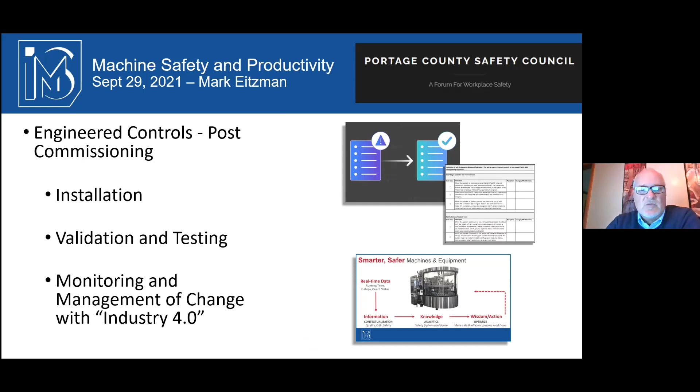We'll spend a majority of our time on that today as well. But the first 4 sessions took us through the first 3 steps of the machine safety life cycle. We're going to finish up the last 2 in just 1 session here, but this will give you some context to where we are, with the process flow.

So let's first start about installation. In particular, the safety engineered control solutions that we were talking about in the last 2 sessions in detail require that they are installed properly. And we'll try to do some checking on this stuff after they've been installed, but there's some things that even the validation and testing won't cover.

So there are contractors out there that are better than others at handling or installing these sophisticated machine safety solutions and the technology, be it hydraulic, pneumatic, electrical, or electronics. So it's just something to keep in mind.

The standards that guide all of that here are from NFPA and some IEC standards that look at how these items should be wired, how things should be routed and installed. And so some conventions are good best practices, not only for electrical safety, but for the installation of these electronic, electrical, pneumatic, and hydraulic solutions.

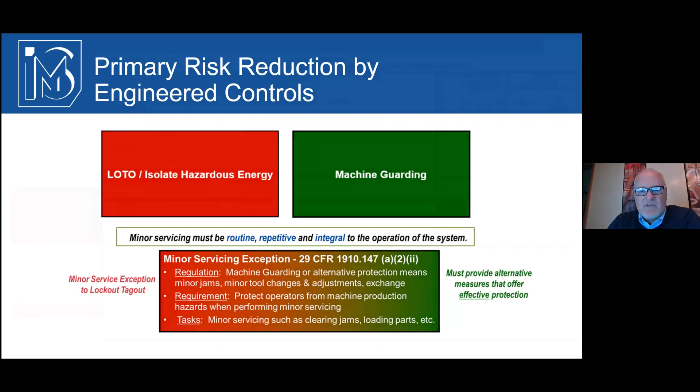So we're going to concentrate here primarily on the minor servicing exception solutions that we talked about last week, the engineered controls aspect of it. Just a reminder, the default is still lockout, tagout, and fixed guarding. But when we require access to a machine with energy on, all of those neat solutions we came up with within the minor servicing exception are listed here. We went through each of those as well, and you saw in the previous sessions how much work and what goes behind putting solutions like this in.

So if you ever hear somebody who may not be as familiar with the details say, hey, let's just put a light curtain on there, or let's put a safety mat there, or let's put a safety valve on there, you know what goes into it.

That's why we touched on this aspect of performance level and the attributes of those circuits - the wiring structure, the reliability of it, the ability for it to diagnose itself. The performance levels in the chart we showed you, at least the calculations, these first three attributes are all that really show up in the performance level calculations.

The measures against common cause failure, which are really about how this thing is installed, where it's installed, what the environment is around it, is a pass-fail aspect of it. Essentially, if we can't guard against common cause failures, we fail this test. It's a go, no go, pass-fail aspect of it. If we can't pass this, all of what we just talked about - the performance level, the circuits - all of those solutions are not viable anymore.

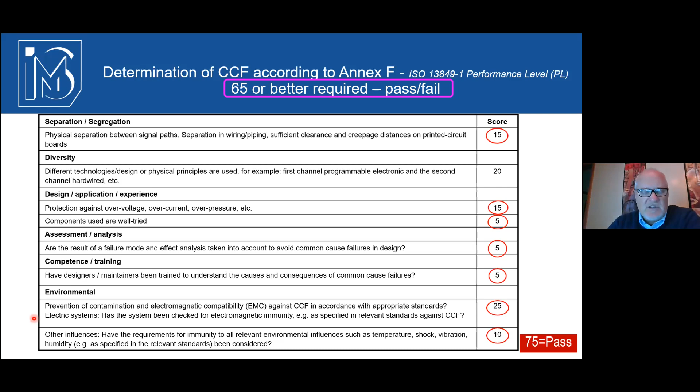So here's the test - we saw it in the ISO 13849 pass-fail test. A lot of that really goes into the installation of it, and it's not something that should be taken lightly. Any contractor that installs wiring or pneumatics or whatnot, you really want to vet them to determine whether or not they're familiar with those standards we mentioned, and whether or not they have some experience installing safety circuits.

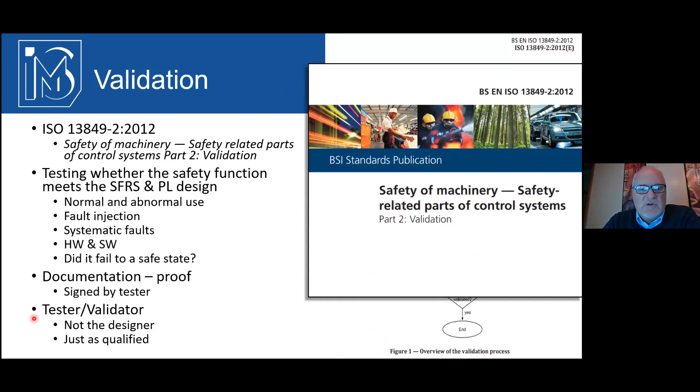Okay, so let's assume we have installed it using a competent contractor, and we're going to move on now to the next step - the validation of it. This is basically laid out in a specific standard, 13849-2, that will lay out the process at which one goes through to validate these circuits. So again, we are depending on a circuit as our primary means of risk reduction.

So what we're going to do in the validation step is actually try to see if we can get it to fail. We're going to induce faults during normal and abnormal operations. We're going to see, will that circuit fault to a safe state? We'll mess with the hardware, the software, the wiring of it all, and see if, in the foreseeable use and misuse of this solution, it faults to a safe state. And we'll document that as well.

The person doing that should be familiar with these as well. There's recommendations that the person who designed the solution and installed the solution should not be the same person who does the testing of it - sort of like doing proofreading. It's harder to proofread your own stuff than to read somebody else's.

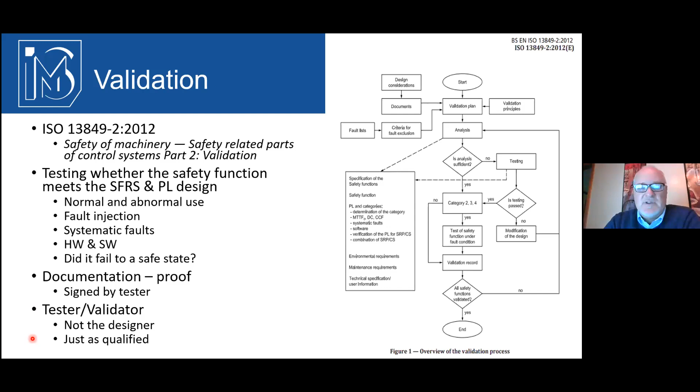What OSHA is going to be concerned about, and what we should be concerned about here, is this concept of control reliability. Really, that's what we're putting to the test - in the definitions of control reliability, when using a circuit like that, is whether the circuit can withstand a fault.

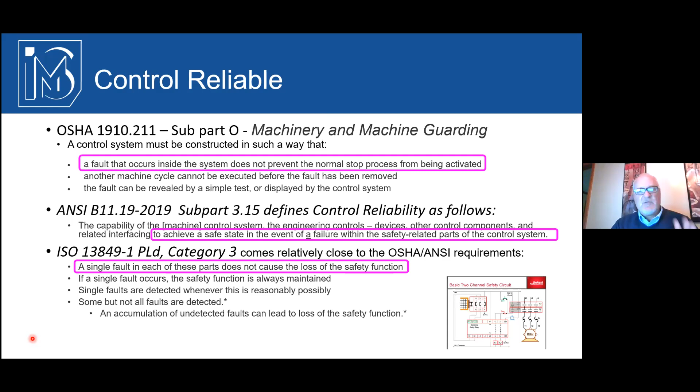So we're going to induce these faults. We're going to break wires. We're going to intentionally short circuit things. We're going to disconnect communication cables and see, does the machine stop or get to a safe state? Does it fault, and does it fault to a safe state in every which way we can? We're going to do all sorts of abusive stuff to this thing, probably well and beyond what we'll see in its real life, but to see how it will work - during normal and abnormal operations, we'll try to make everything fail and see what happens.

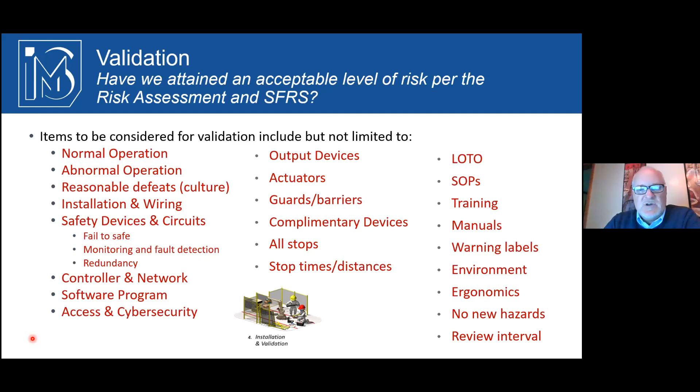Further, we'll document all of this stuff, and the person doing the testing will put their name on it and ensure that, yep, these were tested. This becomes part of your archive.

I can tell you there are some companies out there, I'll name Kimberly-Clark as one. If you've ever tried to sell a machine or been involved with anybody from Kimberly-Clark, they won't even consider a machine builder at all if they don't have what's called V&V documentation. That's verification and validation. So that verification we talked about in step 3 when we were designing those safety circuits, we'd use Sistema to get a verification report. Did I design this safety circuit to meet the performance level that is reflected in the level of risk which that is going to mitigate?

That's the first one, that's a verification, third-party verification. Now I'm going to validate this after I install it. Are all my engineering assumptions correct? And did my stop time calculations and whatnot all do exactly the way it was supposed to? So then I put my name on that, and that becomes part of the archive.

So if Kimberly-Clark is buying a machine, they will not buy it until they see the verification, the validation, the V&V documentation. That's an example of an extremely mature company. You might want to consider that. Test your machine builders. If you're buying machines out there, or if you're a machine builder itself, you may consider that as a valuable investment in marketing your machine, that hey, we're a safe machine builder. So all of that kind of boils back to the first session we talked about, which is the safety maturity level of the market and the industry or segment customer you're talking about here.

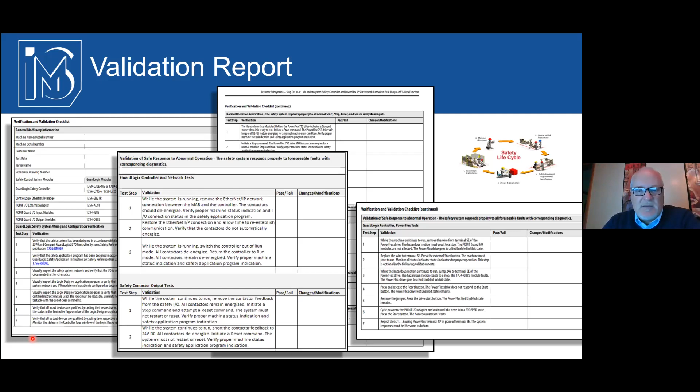Okay, so we've installed and we've validated, we've documented all of this stuff. So we got a lot of great stuff going. So now what? The contractors leave, everybody's gone, we're running the machine. What happens after that? How do we ensure that these really cool solutions we're depending on - remember, you're going to have your daughter reach her arm into that machine, and it's only a circuit that's keeping her arm from getting cut off. Think about it that way. Well, how are we going to ensure that is working throughout the entire mission of the machine? And by the way, the default in the standards anticipates that a machine will last 20 years. So how do we ensure that circuit will be operating as expected for 20 years?

So most companies have some sort of management of change process or procedure in there. The question is, do we have specifics for these engineered control solutions where we are testing those on a periodic basis as well? This should be part of the corporate policies, but the issue comes in when we talk about the limits of the machine in particular - how is that machine operating, the temperature, the humidity, all of that stuff. And the recommendation is, if you install a machine in the winter, test it again in the summer, and vice versa, because a hot and cold machine will operate differently. So all of those assumptions we made versus the actual of what we're anticipating - are we seeing that?

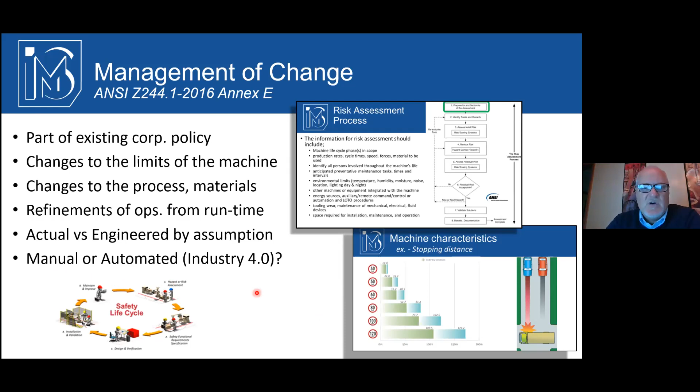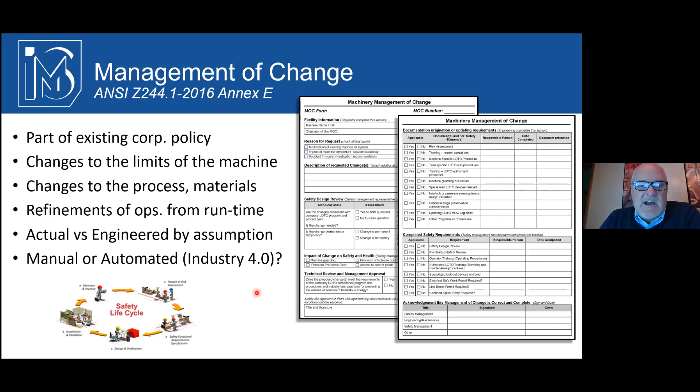So we've got a choice. We can run this manually, where we have forms and people doing testing observations or writing stuff down on a periodic basis, or there's the ability to make some of this done in an automated process. So here's some examples of the manual process, but we'll talk about next some of the more visionary things companies are doing today - how could I automate some of these checks and balances as well?

So the question also arises, how often should I be testing these safety circuits out there? Unfortunately, there's not a lot of guidance - in fact, there's almost no guidance whatsoever from the standards. But here's some concepts or ways we can look at this. The way I would look at it is that if I'm using an engineered control as the primary means of risk reduction, I would use that risk assessment to determine from the start to what degree am I reducing the risk. So if I'm reducing something from very high to negligible, I should probably test it more often than one that's going from maybe a medium to negligible, because you are talking about an investment in time and effort. It probably isn't going to be something that damages a machine, but it will take some investment and discipline to do this on a periodic basis, and keeping a qualified person to go about doing that as well.

The real issue is, one, the degree to which I'm using this and how much risk am I reducing, and the other part is if I'm dependent on these limit values—speed, motion, force, momentum—and my calculations and utilization of the engineered solution depend on the consistency of these flexible attributes, we should probably increase the frequency of testing. Take those two considerations into thought when deciding how often to test these.

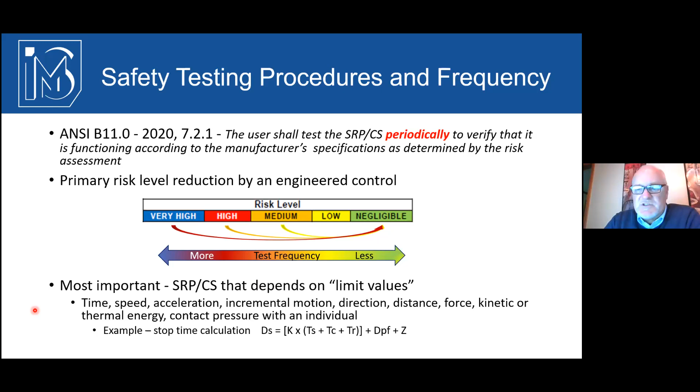I mentioned earlier there's a manual way of managing change, and there's also ways to leverage Industry 4.0 or digital transformation—the fourth generation or fourth revolution in industry—and these are the attributes of it. When we look at a digitized manufacturing facility, you see four main components and how they could be used for safety systems, in conjunction with how they're probably already being used for aspects that affect manufacturing efficiency or OEE.

But the safety system can kind of hitch a ride on the Industry 4.0 wagon as well. It requires some interconnectivity, some infrastructure. There's information embedded in the machine and machine control systems that can be extracted. This gets into a procedural and cultural aspect: do we have the people in place to use that information and interface with it to make improvements in the manufacturing process?

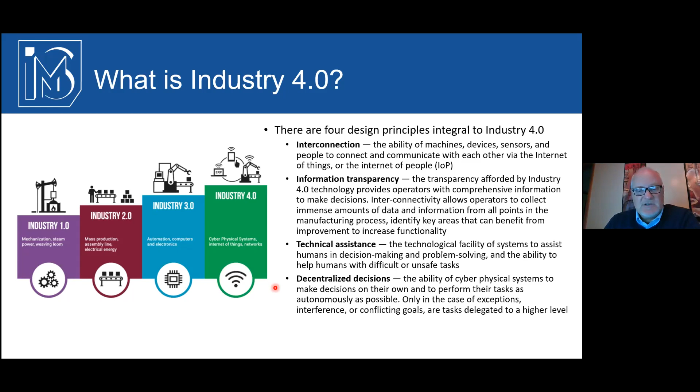Can the machine itself provide technical assistance in diagnosing and getting machines back running again, and or can the machine itself make decisions in order to optimize operations? So those are the primary tenets of it.

To be transparent, safety in Industry 4.0 requires a couple of attributes for the facility. One is all that interconnectivity—there needs to be a control and networking architecture, data capturing historians and whatnot to create data, and then a pipeline and means to display the pertinent information. So all of this infrastructure needs to be in place, along with an integrated manufacturing maturity as well as the safety maturity we were talking about—the culture, policies and procedures, and the technology available.

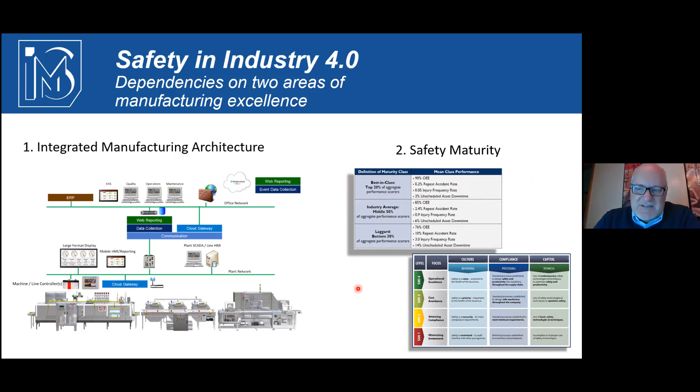This gets into the causation aspects—how are these best-in-class corporations attaining such outstanding productivity numbers and outstanding safety KPI numbers? That's kind of what we're talking about here and what we talked about in the past several sessions. This is the causation part of it—how are they attaining that?

So the concept of safety in Industry 4.0 - and you can put productivity, quality, all of this stuff in here too - the flow is, think of this as... and this is just an example machine. This is a rotary filler made by BevCorp out of Willoughby, Ohio.

You can see the glass or plexiglass guards that are keeping it contained. All of those guards are movable because access to that machine is required for cleaning and for adjustments and stuff. So this is a good example of a highly collaborative machine type of scenario.

Obviously there's sophisticated controls in there, and inside those sophisticated controls - basically the computer that's running the PLC, that's running the machine - there's data on exactly how that machine is running. The flow here is to take that data, contextualize it, turn it into information, present it to people or maybe computers that can analyze this and turn it into knowledge.

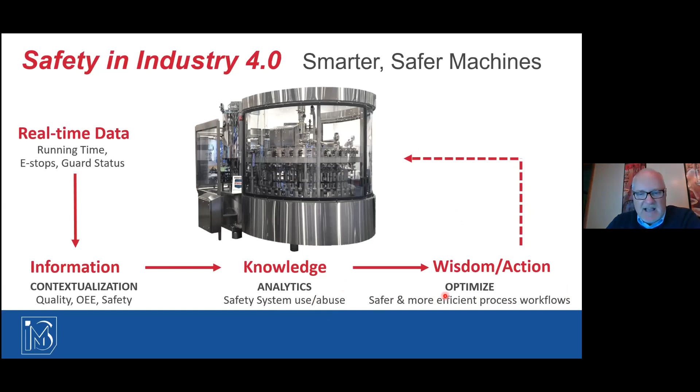Take some action then and say, let's close the loop on this and make some continuous improvement efforts based on the data and based on the analysis of the information. Let's go take some action.

Some examples of the data on our engineering controls that are on this machine are the raw numbers that are going to be housed - they look like this. They're not very helpful in this form, but this is the raw data that would be in a programmable controller data table, looking at the data from the sensors and from the actuators and whatnot. But you'll get raw numbers of these aspects of it.

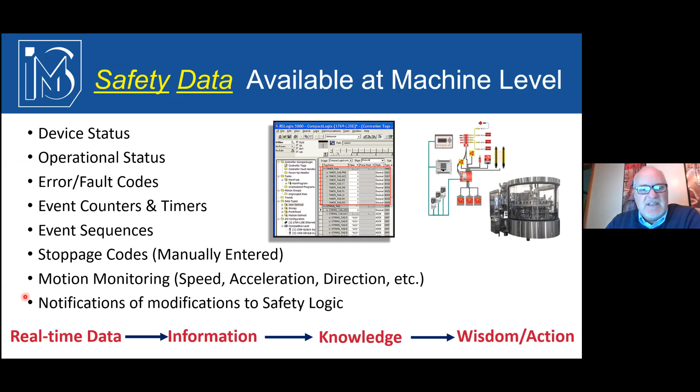The next step is to then contextualize that, put it in some sort of information process. So a historian or computer algorithms that are going to present it and turn it into information to answer some of these questions like this.

How often is that safety system actually being triggered? Why am I down? Why did I stop? Why did I remove power? How often and how long is lockout tagout being performed? So those would be sort of raw information.

Then if I'm reading that information and I can make some interpretations on it, I can start to ask some of these questions and get some answers based on real information - not anecdotal stories, not walking down to the plant where hopefully one person tells me one thing, another tells me another, rumors or whatever. This is raw actual facts where I can say, are certain individual shifts or areas better or worse than others? The what, when, where, why, how - all of that. I can become extremely confident and very certain that I know the truth of knowledge, what's going on out there.

And with that, it provides me with the credibility as an EHS professional or as an operations professional to go and make changes. And I'm not going to run into any resistance out there to say, hey, we ought to do this. Well, why do you say so? Well, I have absolute data to say if we change that, things are going to run better.

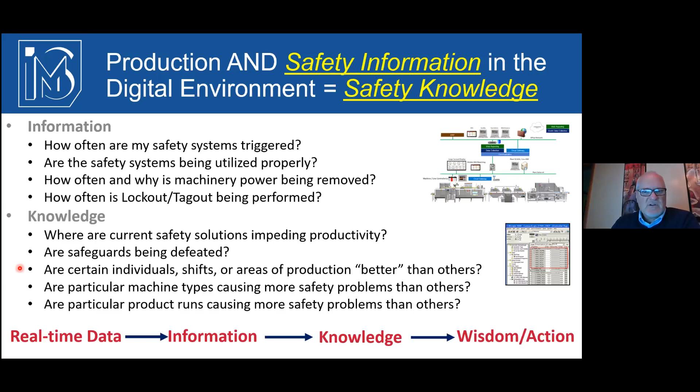So you'll hear companies hiring data analysts and having software and stuff to deliver this stuff. So let me show you some examples of where this could be utilized.

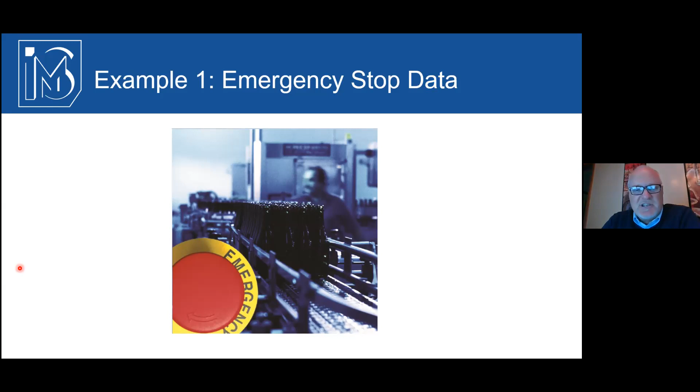So the ubiquitous emergency stop on every machine - every machine should have one of these. So what can you get? That's just, I'll say, just one bit in the machine turns on or off. I'm in emergency stop or I'm not. Right? So it's a pretty simple data acquisition aspect of it.

But as we talked earlier about different types of stops on manufacturing machines - the e-stop and the normal stop and the protective stops, or normal stop and cycle stop, right? Same thing. When we're talking about downtime, the implications are significant.

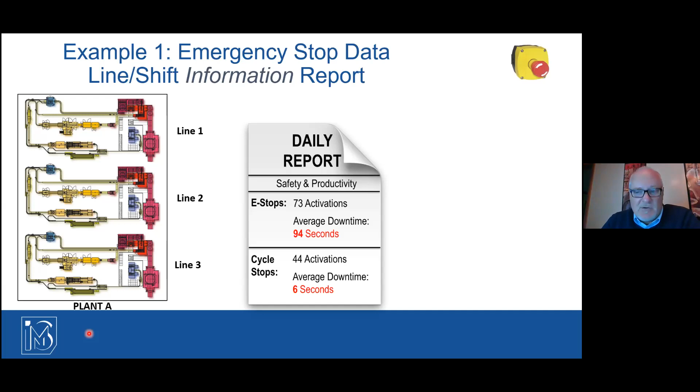You see, just in this example here, if I hit an e-stop, it's going to take me basically 94 seconds to recover from that. And we can know that for sure because there's timers in these PLCs that can count how long we're down. And we can know for sure that a normal stop, a cycle stop, I'm only down for about 6 seconds. So with that, it's very valuable data that can certainly contribute to OEE.

So if I can add an operator option, if they do hit e-stop, to say why did you stop? Or if I hit a cycle stop, why did I hit a cycle stop? I'm probably most interested in those e-stops because that's 94 seconds of production every time we hit that. So I can maybe ask through an HMI, human machine interface device, or even just a set of push buttons and say, I hit e-stop because, push the button that says I jammed the machine.

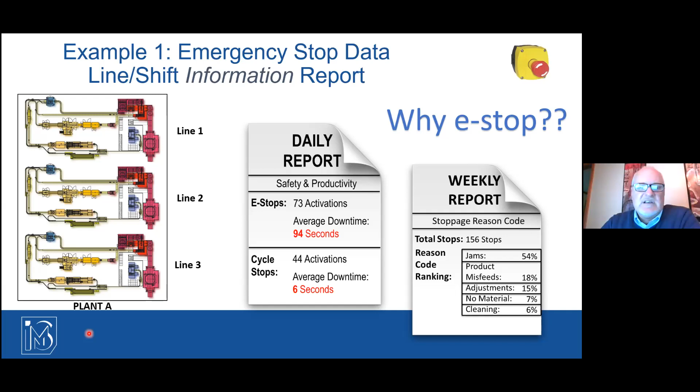With that, we can start to answer where is that happening? Is it happening for every machine or every production line out there? Now we can find some richer data in here. I can see, hey, it's just lines 1 and 3, and it's only happening on third shift. That's pretty good information to go use, to show up on third shift, take those 2 production lines and talk to the folks about what's really happening there. Do we have a material problem, a machine adjustment problem, or do we just need to educate somebody on the proper use of the machine?

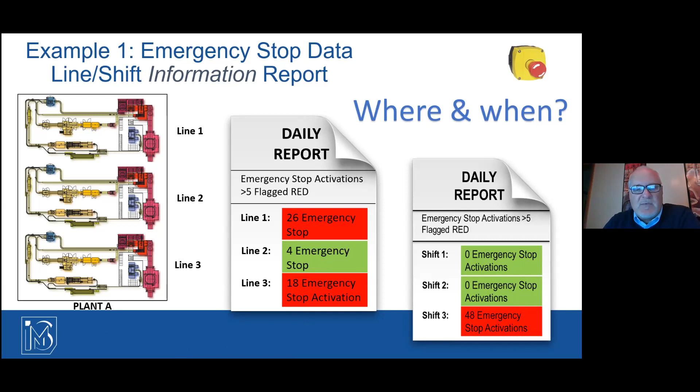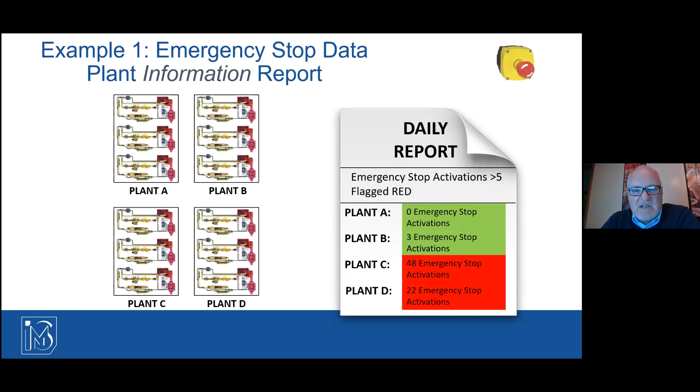So with that, you can see the productivity on line 2 is probably way higher than these other lines. I can expand that out if I'm looking at multiple plants too. Maybe I've deployed these machines or these types of processes across plants, and I can share this information with the other plants as well. So when, where, why, how did we stop? Some pretty interesting information just from one single bit that's residing in that PLC. I can find all that stuff out.

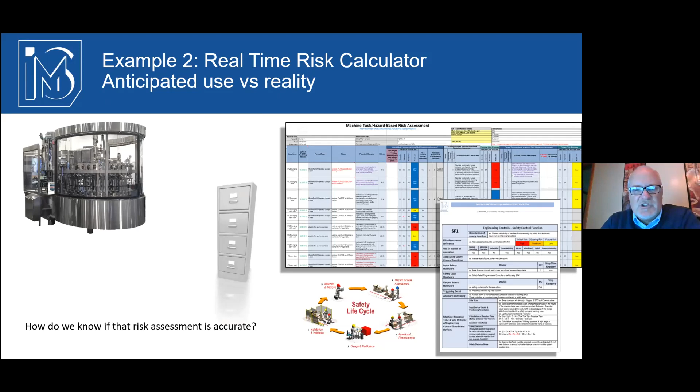We talked a lot about risk in the first couple of sessions, calculating the probability, severity, the exposure, and the ability to avoid, and whatnot. So we spent a lot of money, time and effort on our risk assessment. There's a lot of rich information from when we did that thorough examination of the machine and how it's operated. The question is, what happens to that information once I'm done with the risk assessment? Maybe I've used it to create a functional requirement spec, but a lot of times it's really not used later. So there is some good data that could be used on this machine in how it's operating.

For one example here from the risk assessment, we've seen again this rotary filler. I've got 10 access points on there. What if I made some assumptions on how that machine is going to be operated by this particular user, and I've designed my safety circuits based on this as well? How many times are those doors going to be open? How many times will I trigger that? And every time I trigger that, I'm probably putting the machine into a safe state, which typically curtails productivity somehow. What if I could track that stuff, and do I really know for sure?

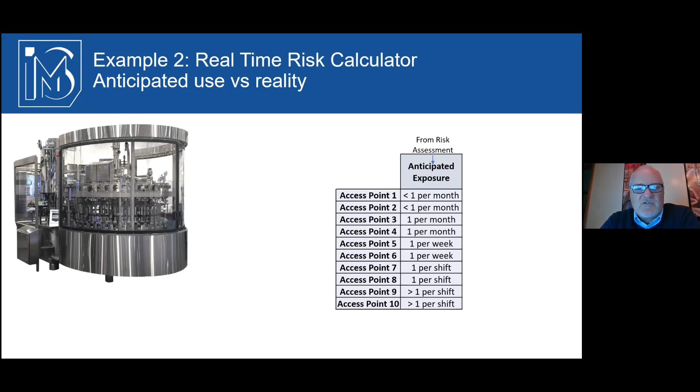So obviously the PLC, every time you open a door, it's going to know what door is open. It's just an inherent part of the design of the control system. You'll want to tell the operator, hey, door number 5, whatever it is, is open, you're not able to start the machine. So it's information that's already there. You might as well use it.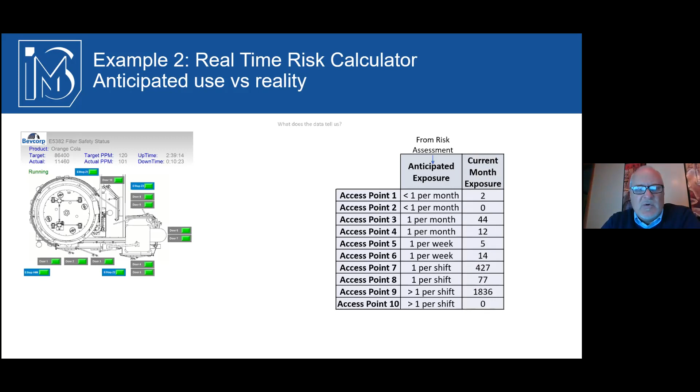So what if we tracked what was actually happening? Because the PLC knows it. After you've got some runtime in that machine, you put some counters on those doors and put a time frame around it, you can see in a month's time what the actual was versus what my assumptions were.

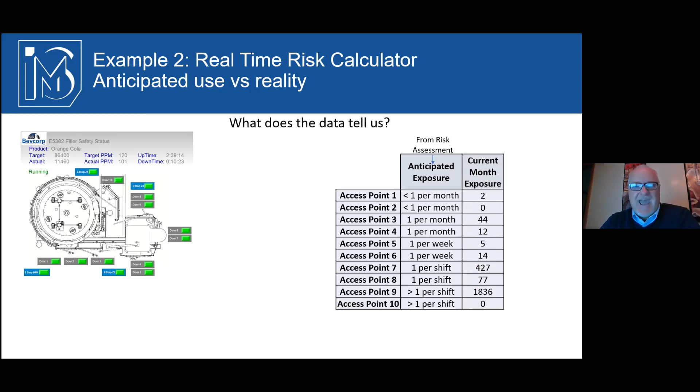If I put some context around this, I'm taking that data and turning it into information. I want to know the percentages of overuse versus what I anticipated, and I'll throw some color on it to make it really pop out, and say I probably should reconsider how I design the circuit, or how the machine is designed today. If I'm going to build another machine, that would be helpful.

But these might be our areas here to say they really shouldn't be opening it that often, but man, 1,800 times in the past month, that seems pretty excessive. So these are the ones that would jump out right away, hey, I'm overusing those. But there's one in here that might be even more interesting, access door number 10. There's no way they can operate that machine without accessing that point at some point during the shift. They have to lubricate something or adjust something or whatever. But the PLC never sees them tripping that safety function. Have they defeated it?

Before, you'd have to take a look and see if they figured out some way of doing that. If I look over the past data, I could add more context. If this data was available, I could see over the past 6 months versus this month how things have changed. Are we running a different product? Did we use a different raw material, maybe a different can supplier? Maybe something's not working the way it was before, and sometimes that can induce some risk. Things change, routines change, and I've got to do something different with these.

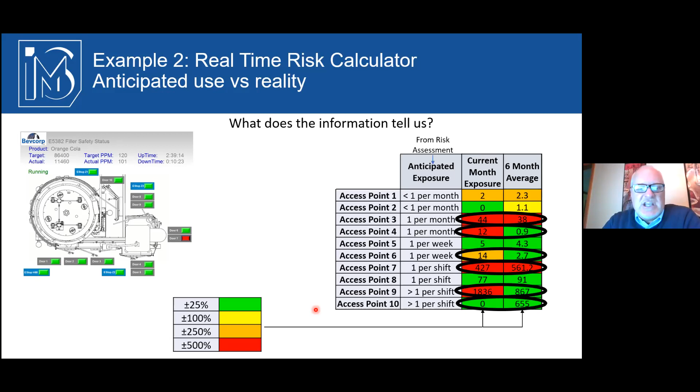So it's something that would be brought to the EHS professional to say, we really ought to take a look at those aspects of it. You can see how the risk could be changing as this machine goes on, and the machine can tell us that. It's pretty cool.

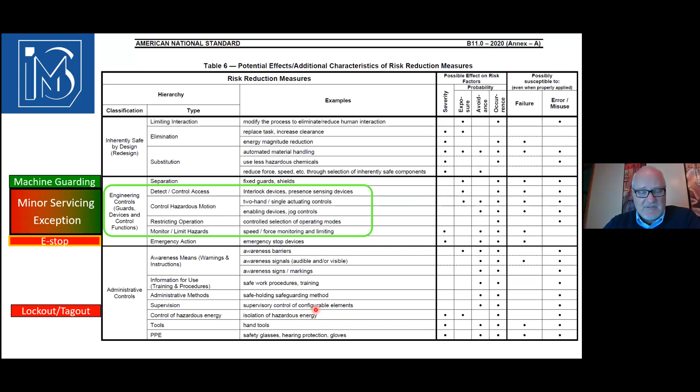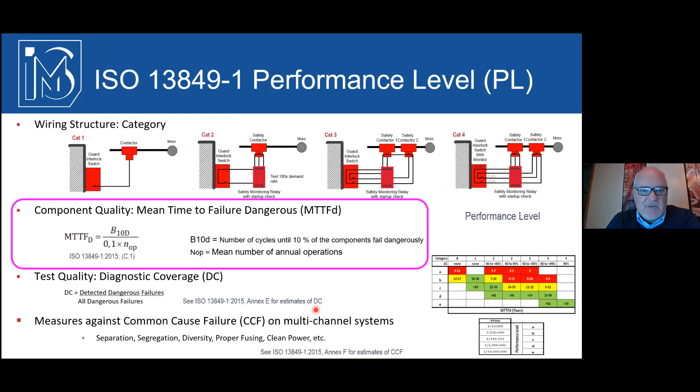Now, reliability—here's another example of why this would be important. We all know these things wear out, and we're depending on these devices and circuits to keep my daughter's arm from being removed from her body. I want to know, are these systems still as viable as the day I put them in? Remember our calculation: based on our risk assessment, we determined the performance level, the type of circuit, the quality and reliability of that circuit needed to be at a certain level. We did these calculations based on that.

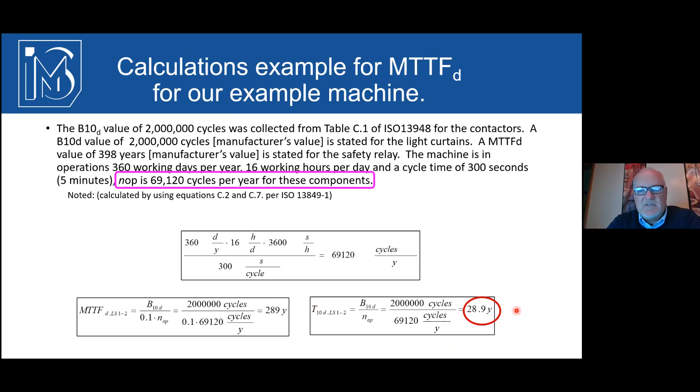So in this example machine, you'd go through all these calculations and say, I'm going to use a circuit and trigger it roughly 70,000 times per year. When I do the MTTFd calculations, I determine that the components I picked are going to last almost 29 years. And when I did that, it also detailed the type of circuit, or the performance level, which I'm trying to attain.

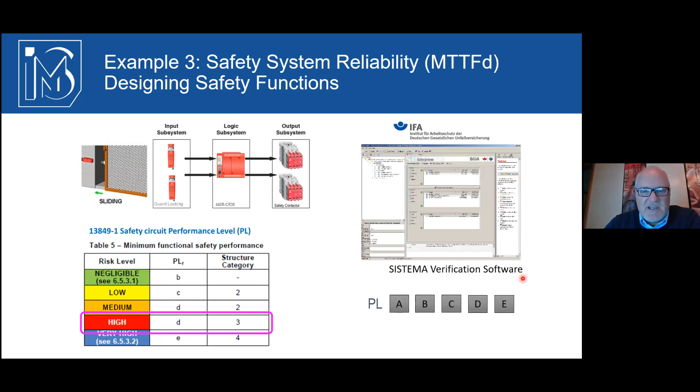So we know that from the risk assessment. I designed this circuit based on the work that was done. Our designer said, I'm going to pick out these switches, this controller, and these contactors to stop the hazardous motion when I open the sliding door and expose the operator to the hazard. I did the first V in my V&V verification documentation—the verification aspect—using third-party verification software to ensure I have in fact attained my performance level based on all the assumptions about how that machine is going to be used.

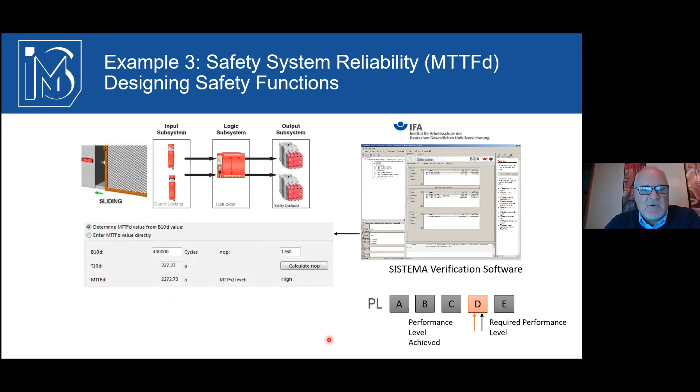Here's a field from the SISTEMA software where you'll calculate the data. We determined this circuit—the door—would only be opened once or twice a shift. So that's what went into it. Basically, I should only see less than 2,000 cycles or triggers per year based on the calculation, using information from the manufacturers of these devices. This whole safety function—input, logic, and output system all together—according to the software and manufacturer data, should last over 2,000 years.

So I've got 100 times more cushion, you could say, in terms of longevity than what I anticipated. All of that was based on the fact that when we asked the operators how often they needed to get into that machine, they said once or twice a shift. Well, what if the reality was once or twice an hour? My cushion isn't just gone—I'd be triggering that operation over 500,000 times per year, which is not inconceivable, right?

So my mission time for this whole safety function can't even meet the mission of the machine. I know for sure that at some point in the next 7 to 8 years or so, there's a probability this system could fail to a dangerous state—where the probability actually increases from 1 in a million to, say, 1 in 10,000 chance that my daughter's arm gets cut off as I reach in there, because it turns out the contactors are the weakest link in that whole system. Those things could fail to a dangerous state.

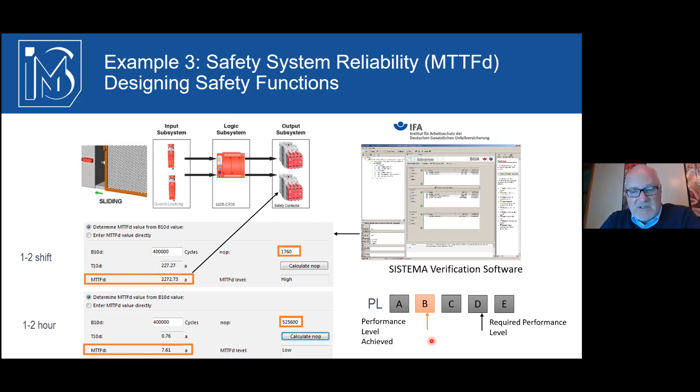The machine may not stop when I slide this door open. I can calculate all of that based on this software. And I did, and I found out that because the reliability was so low, my performance level is performance level B. The great news is the machine knows this - it knows exactly how that machine is operating.

Because we're tracking the use and opening of these doors and access functions, I can load the criteria for the safety functions all the way from the risk assessment, the functional requirements spec, and how I designed it. I said I need these levels of circuits, but the way I'm actually using it, I've got a few areas that probably should be reevaluated for a different design, or have some preventative maintenance flag put out to say I should change those out every 6 to 7 years.

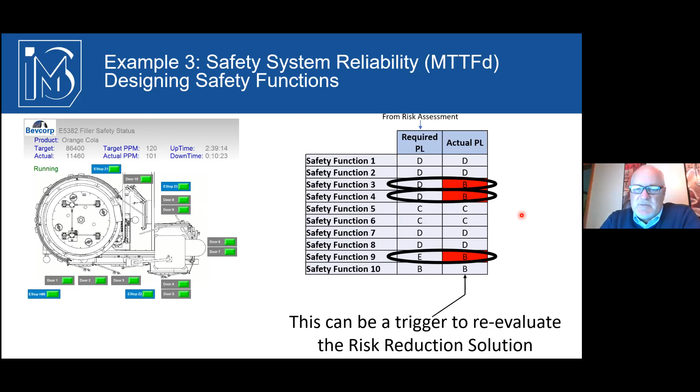So that's another example, right? The machine knows exactly how it's being utilized, so we can take advantage of that. The last one's a pretty obvious one.

One of the reasons to be connected to the machine is management of change. When particularly a programmable logic device and the software inside is a safety rated solution, once that program is written and it's been validated and tested, it pretty much gets locked down. It's locked out and requires a password to get in there and make changes.

So a lot of times there are issues when somebody goes in and makes changes but doesn't save it, or doesn't archive or document it properly. They made some changes - maybe it was to address a machine being down, maybe it's an emergency, and you make alterations, fix it, now it's running. Everybody sighs of relief, but we just let that machine go and run. It might be years, but the record of those changes might get lost.

So if the machine fails and somebody else comes along and reloads the program from their archives, they might reintroduce a problem that was solved a couple of years ago but wasn't captured. We can see all of that in the PLC - it knows that stuff, but it has safety implications as well.

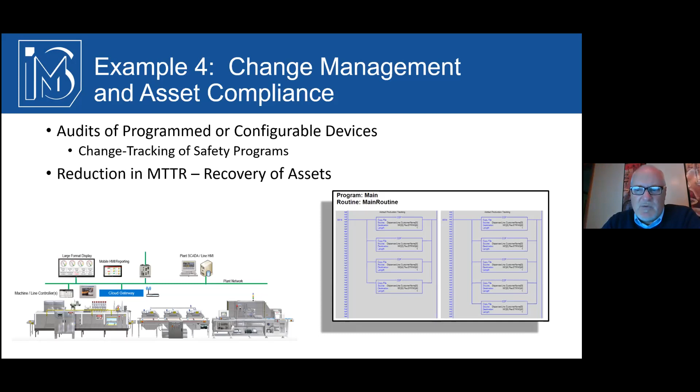Maybe some of the changes we made were to improve safety - maybe the stop time calculation had to be changed a little bit, brought down, or some parameter in a drive that brakes it brings the thing to a safer stop in a shorter amount of time. All of that could potentially be lost, but managing that change and making sure we capture the right one can lead to improvements in safety.

The first two here, when we talk about the descriptive or diagnostics aspect, can help maybe answer why did my daughter's arm get cut off in that machine. That doesn't really help the daughter, doesn't really help us in the situation. We really want to get to the level where we are trying to prevent that from happening - can we predict it and maybe take some action, make decisions and take actions?

Or if I've got a system in place where I'm doing prescriptive analytics, the machine itself makes a decision or helps the humans support a decision to say, hey, we should make some changes - maybe change out components, or I need to change a parameter because I'm looking at stop time calculations.

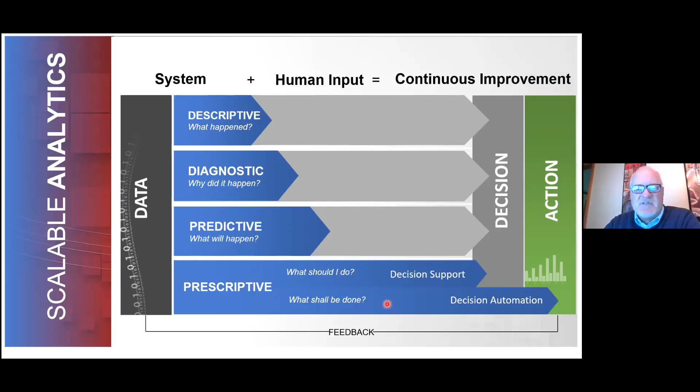the brakes have worn out on this thing. We should probably readdress this, have some sort of flags, some information delivered to the pertinent people. In a case where the machine itself would make a decision, the machine may slow itself down, it may not allow you to hit maximum speed. It begins creeping back, so my momentum is not so much, and my stop time calculation stays at 5 seconds. And maybe it curtails productivity a little bit, but I'm still not going to get an incident out of that. So that's just some examples of the scalable aspects of it.

So this leads us to, what if all this sounds really great, why isn't everybody doing this? I mentioned the two elements of maturity, the infrastructural digitization maturity, as well as safety maturity, both have to be in place.

You can see an example of a study that was done to say, why don't we do stuff like this? And you can see the top two that do make sense, and they're somewhat interrelated. One, the systems that are in place, maybe they're old, maybe they didn't have the capability and sophistication to pull all this stuff off like the current stuff does today. Maybe they were put in at different eras, or maybe you have a whole new machine, but not everybody was participating in their ideas of how that gets into the cross department collaboration.

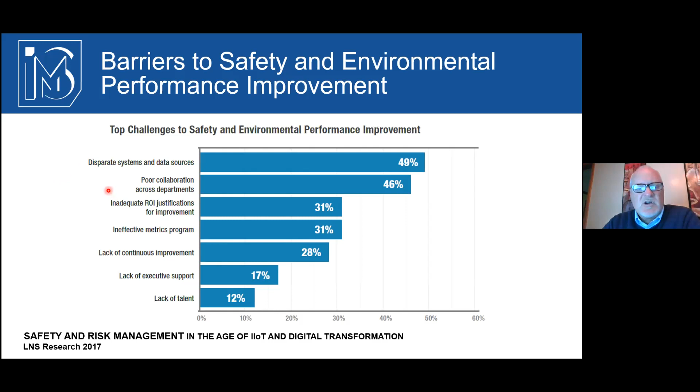So if we have, let's say, some political divides between the different elements of the company and different charters - operations, EHS, engineering, executives - maybe all of that is not collaborating to the degree in which it could. You could end up with disparate systems that don't contribute in a cohesive way to all of these concepts of what I'm talking about.

So Industry 4.0 is probably the hottest topic in the automation world right now. It's a pretty good chance those conversations are going on today at your enterprise, or at companies around the area, because the fiscal benefits of digitizing and using information to manage a facility is without question. So the popularity of it is great.

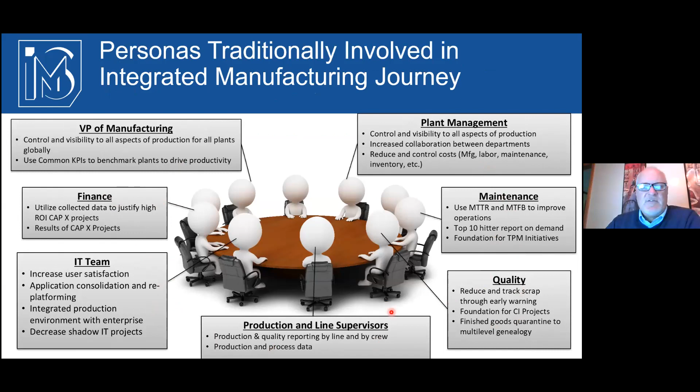These are typically the folks and the roles that are involved in the journey of digital transformation. And there's one missing here that typically is not participating, but probably should be, in order to begin to infuse this - going back to one of the original designs of risk reduction: inherently safe by design. Is EHS, does the safety department have a say? Do they have the credibility? Are they recognized as a viable contributor to these journeys in the manufacturing facilities?

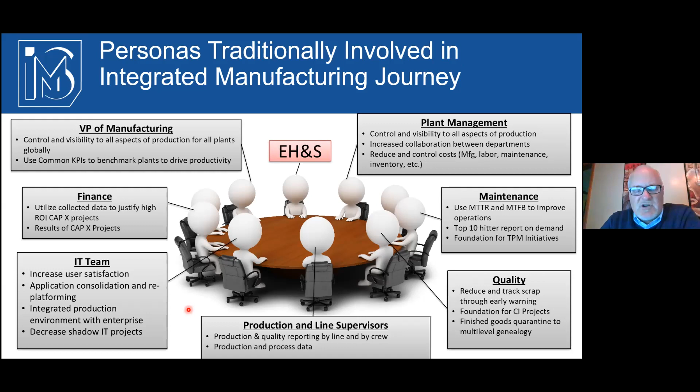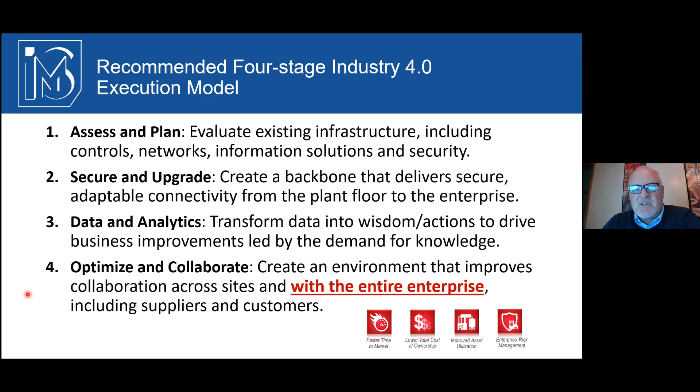Because here's what's being discussed in those conversations: the whole plan and the infrastructure that's going to be put in there, and then the list of information, the types of information that should be delivered to the pertinent people to be turned into knowledge, that are extracted from the machines. And then, how well is everybody collaborating and cooperating amongst the entire enterprise? So these four elements are the four main tenets of Industry 4.0.

Again, this really comes down to those two attributes of maturity: is that infrastructure being put in place, and is safety considered in those conversations? Is safety a good fit into the business strategies of the organization as well? If it is, and maybe we're at a point where we're just thinking about these kinds of infrastructures, these improvements, could safety even be the impetus to do this?

I could tell you about a number of companies that have used safety as the main reason why they went through a major transformation. I mentioned Paul O'Neill and Alcoa as some very early examples of that, but there are examples I could share with you about the Dana Corporation, Goodyear, and a number of other companies - Procter & Gamble, Mondelez, General Motors. They used safety as a reason to put this infrastructure in place, because the safety maturity is so strong, it begins to dictate some of the manufacturing strategies as well.

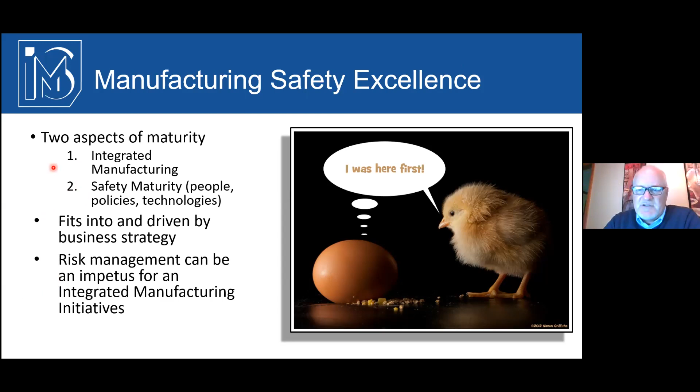So here's the idea, for safety professionals to get involved in those conversations as well. If you have put these systems in place - automated safety solutions, these engineered controls - then there is a reason for you to be involved in those conversations too. So look at these items, come with an understanding of what kind of information do you want to access from these machines, and where do you want it delivered? How do you want it delivered? What knowledge do you need in order to improve the safe manufacturing performance of these machines?

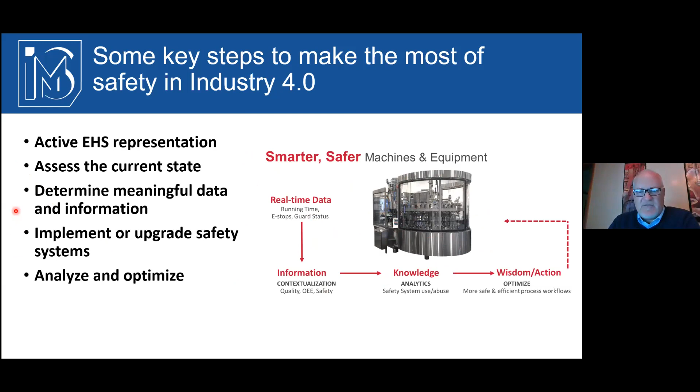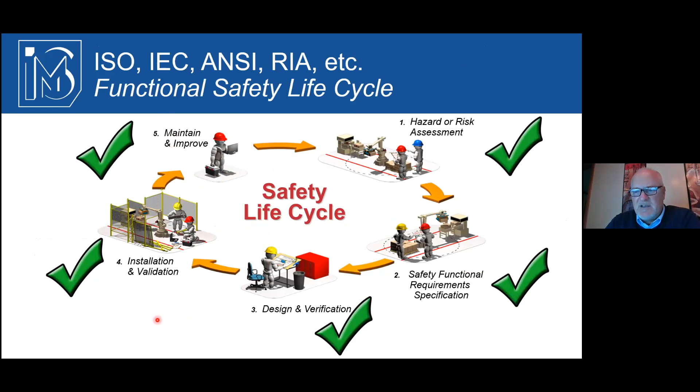So that's it. That's the machine safety life cycle. That pretty much wraps up the conversation about this. I'm hoping we've got some ideas. This is the ubiquitous flow. Every machine safety standard out here will take us around and around this. You can see this connecting arrow, the continuation of this. This is a cyclical aspect of it too.

It's meant to be done over and over again on a continuous basis, much like any aspect of continuous improvement. So as we saw, a quick recap of these 5 sessions: the societal demands, the aspect that the safest companies in the world are the most productive. That secret is getting out, and more companies want it. They're utilizing new techniques, technology, and manufacturing concepts, which has driven a demand for recognition of some of the existing laws that are out there, but also revisions of the standards to take advantage of that. Every day there's some new technology that challenges the status quo, driven by these demands, standards, and laws—it's the law of a capitalistic society to continually improve.

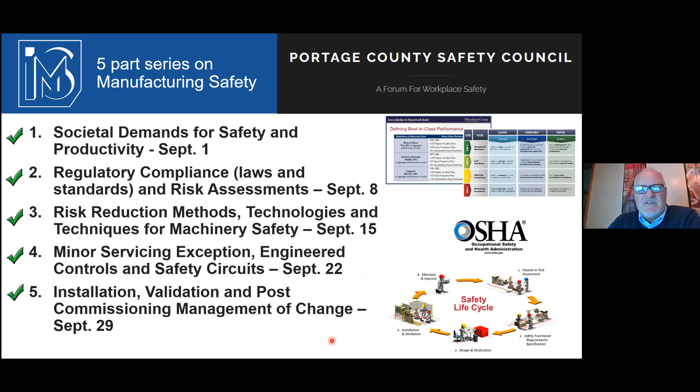So that's kind of the recap of how companies attain this. The safest companies in the world are the most productive. The data is very clear on that. So anybody still with the perception that the only way to be safer is to sacrifice productivity should really reconsider that thought, and realize the safest companies in the world are the most productive. It can lead to some tremendous improvement.

If you've ever read the book Good to Great, how do these companies become great places? A lot of it depends on the people and the quality of people you have in place. So the ability to manufacture in a safe, responsible way can lead to a company's greatness and the people beyond it. Ultimately, as a corporate citizen in our society, it's simply the right thing to do. This concept of corporate social responsibility should be a rich environment for us to generate justification to at least have the conversation and be involved in it.

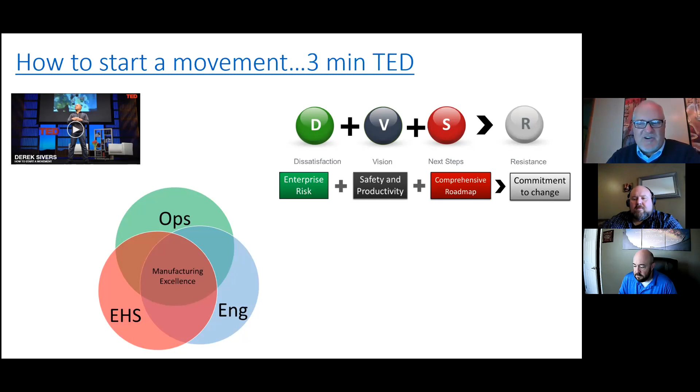One parting thought—since we have just a minute, I want to point out my favorite TED Talk. One of my favorites because it's only 3 minutes long, but it's fascinating and very pertinent to what we're talking about. If you are inspired by these 5 sessions, you need to become that inspirational entity within your enterprise and get the ball rolling, start a movement. That's really what this is about—a quick social study that shows how a movement gets started, and it's a fun one too.

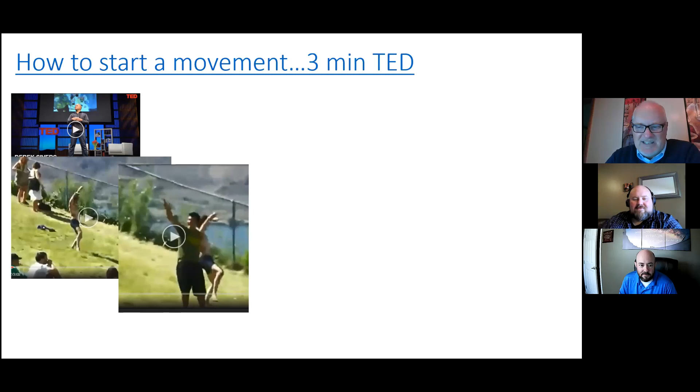The presenter is great. It starts on a lawn, the lawn seats at a concert, and everybody's just sitting there listening to the music. One guy gets up, starts to dance, and then it shows how the mob scene changes from his first followers into a little group, and how he celebrates those followers. Before you know it, in 3 minutes, this one crazy shirtless dancing guy gets the entire lawn dancing, and he relates it to the human behavior aspect.

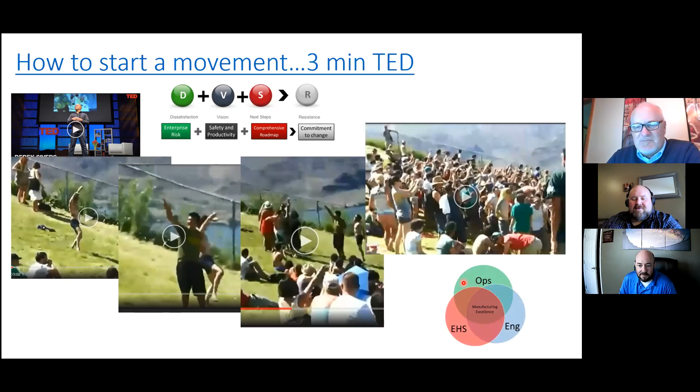So as you're trying to start a movement with the multiple entities of your enterprise—operations, EHS, engineering—how do you align all of those and the leadership within that? How do you take that to the executive level in a unified perspective, with operations, engineering, and EHS all wanting the exact same thing? So when we talk about this change equation up here, think about not just the dissatisfaction, vision, steps, and resistance to change that you've got as a safety professional, but think about operations and engineering as well. Collect all of those and get agreement among them, so that these columns of what we want to go do and change are aligned throughout the entire enterprise.

So take a look—you can just search on this guy. I can't remember his name... Derek Sivers, I think is the name. But just search how to start a movement, Derek. I think you'll find it on TED Talk, and it's an entertaining, worthwhile 3 minutes.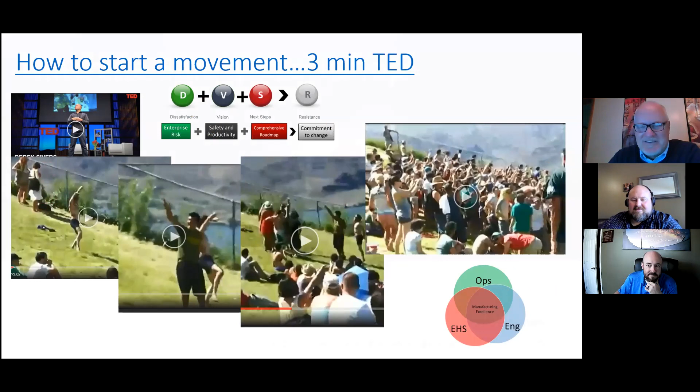Take a look at that. So with that, that's a wrap, and hopefully we got some questions or comments or bullshit flags or whatever you want to throw here. We're open to discussion here, Mike and Nick.

Hey, that video is great, Mark. I saw it years ago and I watch it time and again. It's definitely entertaining, and you never hear anyone talk about leadership in regards to the first follower. So there's definitely some insight there of how to get things going and focus on that. It's kind of like a creative way to talk about the 80-20 principle, where 20% do 80% of the work. So you focus on the 20% and you'll get more productivity. It's kind of cool.